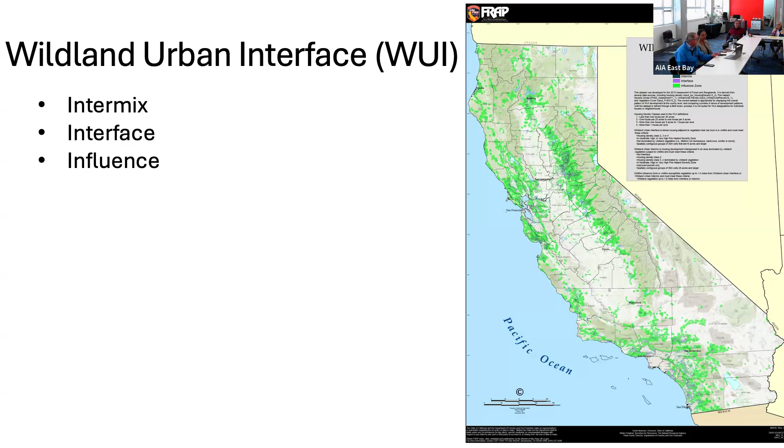So one of the things when we start to approach a project is you really need to determine very early on, is the project in a fire zone area, and who is the jurisdiction? Because the code says one thing, but each municipality or each jurisdiction can have even more stringent requirements, and they vary tremendously.

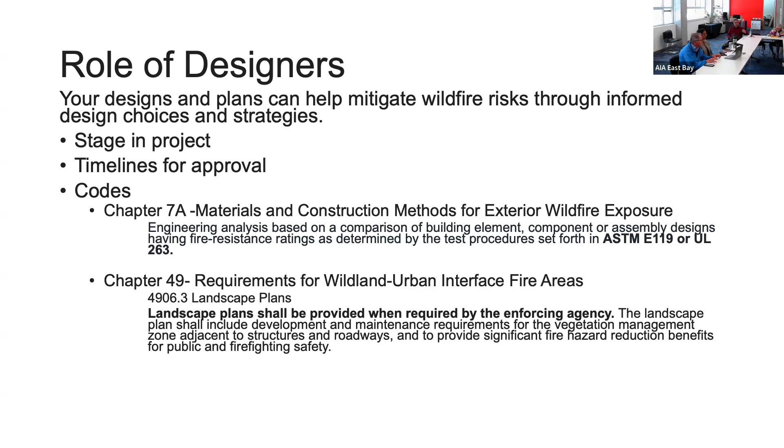Chapter 49 looks at what are the additional requirements for wildland urban interfaces. So when the jurisdiction, either the city or the enforcing agency, requires landscape plans, we have to provide a landscape plan. Some of them call it a vegetation management plan. So we have to get into the zones and we'll talk about that. Oh, 1 second before we move forward. So there's really two areas. One is the idea of what's called hardening the building, selecting materials that are fire resistant, and that's mostly with respect to Chapter 7A. The other, Chapter 49, is really dealing more with reducing the amount of fuel within the perimeter of the structure to reduce the risk of fire spread.

So there's the role of the architect, designer, landscape architect, but a lot of this also is really the role of the owner, because as a designer, you can only do so much. And then in this condition, maintenance is a huge need and requirement. And so that really falls on the owner to continually maintain the property throughout the year.

But for fire, et cetera, fire departments require an address clearly marked because fires spread very quickly. If the fire department can't find the property and get to the property, say in a rural environment, your trees or whatever is covering the access to the property, that hinders the ability to fight that fire quickly.

And fires can spread extremely fast. There's a record of a San Diego fire that in 1 hour consumed over 5,000 acres of land. I mean, they can move very quickly and create their own climate as well. So some things can be addressed, I think, on the owner's behalf, not necessarily involving the designer, creating a more defensible space in terms of maintaining that property. We'll talk about that a little later.

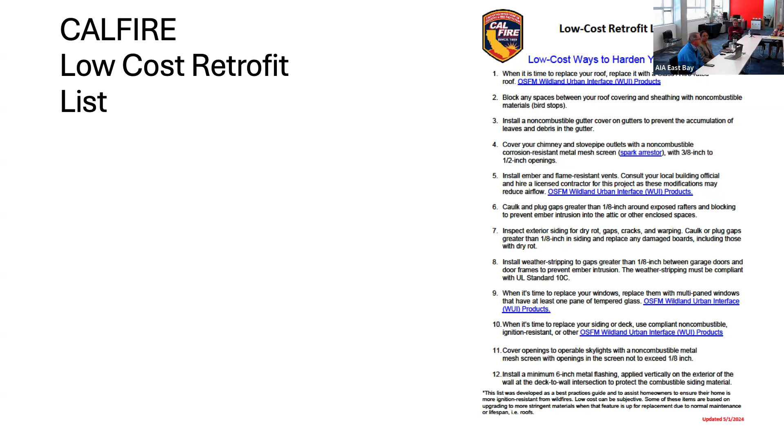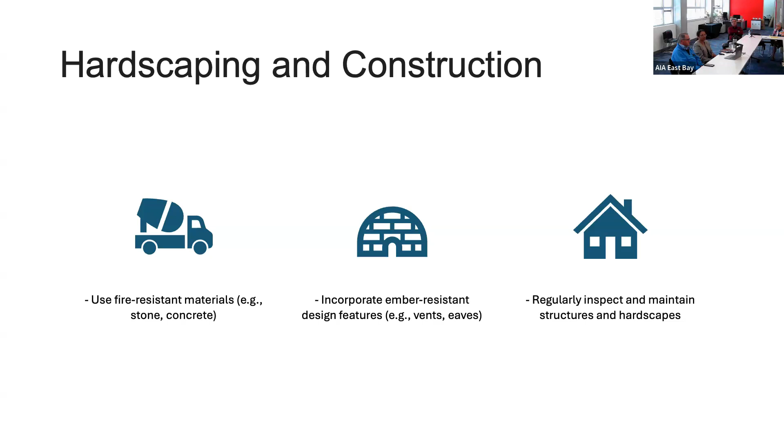When it comes to hardscaping around the house, one of the requirements was to use only stone and concrete in the paving, not to use any flammable products. So use pebbles or stone or concrete, and incorporate ember resistant features, like the vents and the eaves should be ember resistant, and regularly inspect them. So whenever there's a maintenance inspection, make sure that around the house, within the first 5 feet, all the materials are fire-proofed.

For decking, because landscape architects deal with decks that are connected to the house, there is one requirement for it to have a metal flashing at the house. And some of the homes that I've worked on that have decks, the planner sends us a checklist, and you have to make sure that it's built out of fire-resistant material or fire-resistant wood. And it keeps coming up. It had to be signed off twice, so it's quite important.

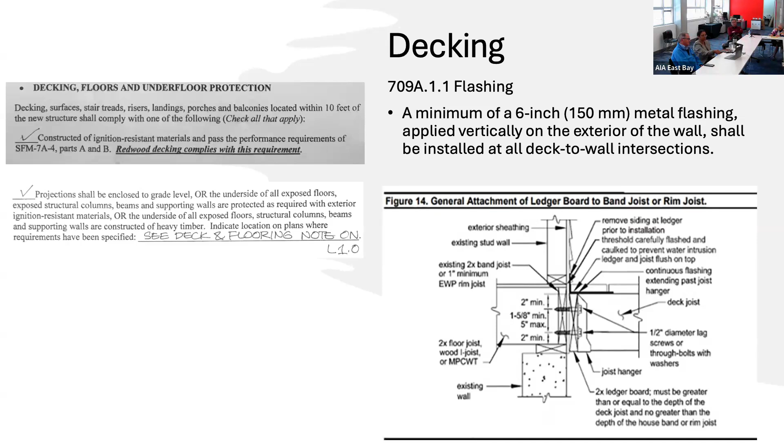Defensible spaces are categorized as zone 0, zone 1, and zone 2. So zone 0 is 0 to 5 feet from the house. And that's the zone where you have to not use fire-prone materials, use very little landscaping, not too much foundation planting, keep it sparse and keep it clean, and make sure that it's inspected and maintained.

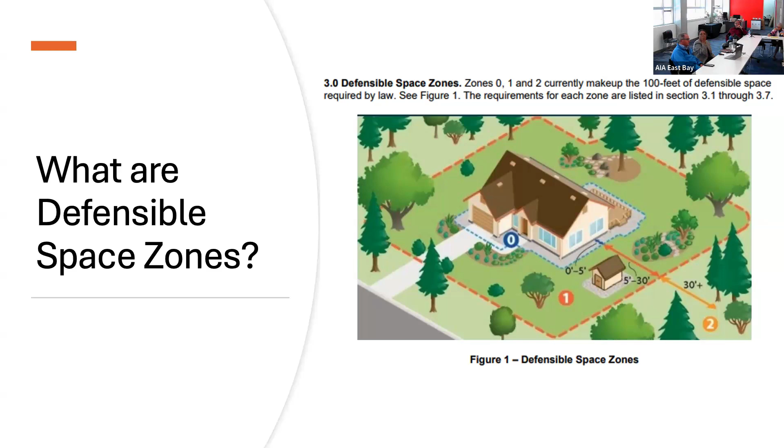From 5 to 30 feet, you can have landscaping and trees, but there are spacing requirements. And that's also something the fire department typically signs off on, because the 5 to 30 feet is quite critical when it comes to existing trees that are fire prone, as well as proposed trees that could be fire prone. And beyond the 30 feet, from 30 to 100 feet is also considered defensible space. So up to 100 feet or up to the property line, whichever is closer, the owner is responsible for maintaining it.

And that first 5 feet is really critical, because you're in very close proximity to the house or the structure. And so the vegetation, you'll see in different jurisdictions it's limited in height, or the type, maybe only 3 inches high maximum vegetation, or X number of square feet, or things like that. And I found that hardscape materials like stone, like pebbles and things like that are probably one of the better ways to go.

Cal Fire has a great video of this, where they put a little shed and they have this 5-foot zone around it. You can again go to the Cal Fire site, and they have one that has vegetation right around the structure, and they light the outside perimeter on fire. And then you see how quickly the one with the vegetation right up to that structure burns, whereas the other one with this 5-foot zone around it in pebbles or whatever is still standing. And it's very effective. So I would suggest sharing it with others.

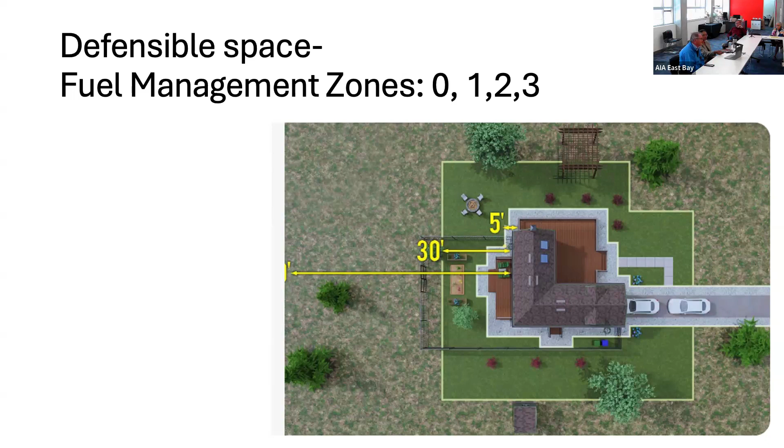Part of this idea of defensible space is to create this kind of a vegetation mosaic where you reduce the risk of fire spread by separating the fuel source, by separating the vegetation. So in some jurisdictions, they'll say, oh, you can only have 200 square feet of vegetation in one area, and then you have to have X number of feet to the next group. And that vegetation can only be like 2 feet high. I mean, there's a lot of stipulations in terms of this idea of creating this mosaic to basically reduce the risk of fire spread.

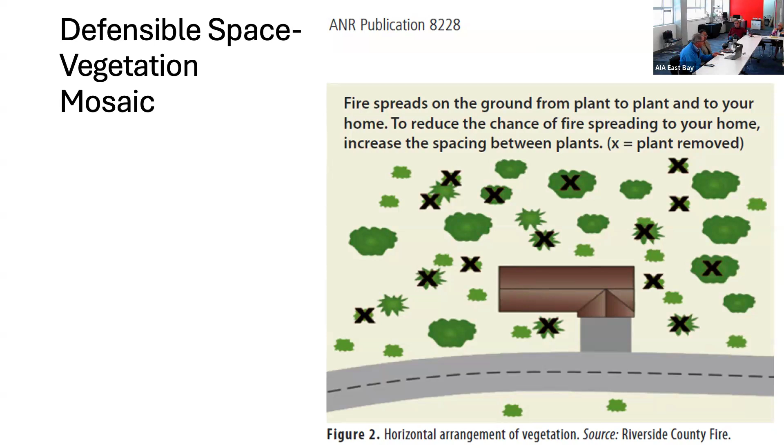Particularly on slopes, because the ability of fire to spread up a slope is critical. And so as landscape architects and designers, there's limitations on the height of vegetation and then how far apart it is in terms of the nature of that slope. If it's no slope, it's 0 to 20%, then it's 2 times the height of the vegetation. And maybe only 10 feet apart of the trees.

And again, actually, we don't mention it in this slide presentation, but part of the code is that basically the code says no new trees within 10 feet of a fireplace flue, or a window, or a roof line, right? But really, if you look at it closely, it's really talking about new trees, not ones that are pre-existing. But if you look at local jurisdictions, they'll say, if it's pre-existing, 10-foot clearance away from any structure.

So this is an issue if you get into steeper land, that this vegetation goes further and further apart. So the aesthetics, we still have to wrestle with this aesthetics. Yeah, I mean, we're gonna go back to the Zen gardens. Yeah, when it comes to the steepness of the slope, on a flat surface, fire flames can be like 6 feet, but if it's steep, it can go up to 24 feet. So that's why we have to space them further apart.

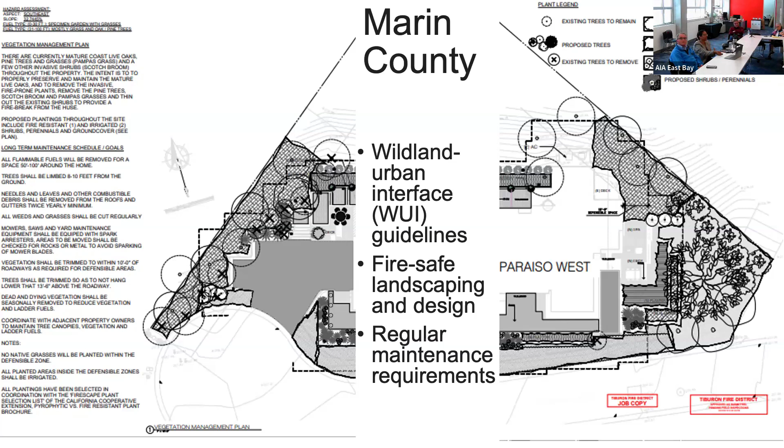And also they had requirements for maintenance equipment, such as mowers. Mowers can create sparks, and those sparks can be quite dangerous if there's dry vegetation. And also trimming of trees and other vegetation within 10 feet of roadways for defensible space. Marin County has a fire department as well as a fire awareness department. So they create educational outreach programs, and that helps a lot.

San Mateo County, for fireplaces and fire pits, the department asks for UL certified products. And a lot of products that are out on the market, like Amazon, that homeowners purchase, they don't actually verify if it's UL certified. So when designers and architects and even landscape architects specify this, you have to make sure that it's UL certified, because a lot of the products in the market are not UL certified.

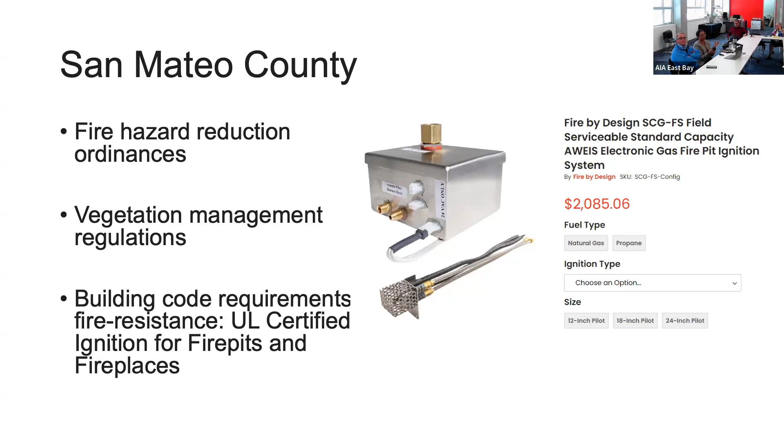They can actually be adapted to UL certified igniters. So that's what we do when we specify a certain fireplace or fire pit. The igniter has to be UL certified, so that has to be an additional specification. So for fire prevention, you use fire-resistant plants and materials, incorporate defensible space, ember resistance is very important, and implement regular maintenance.

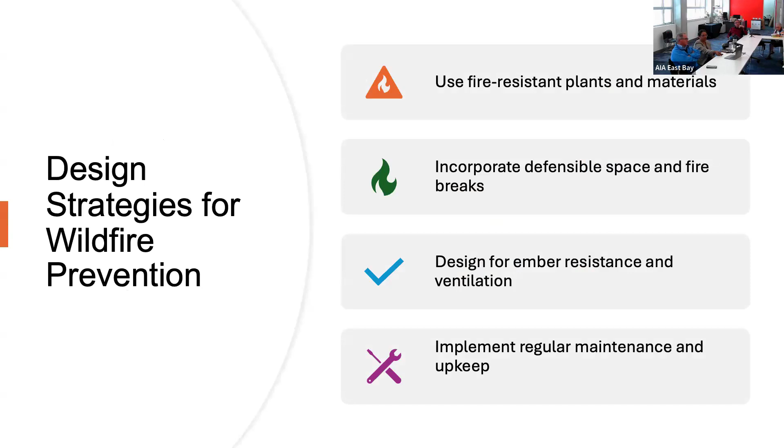So in conclusion, as architects and landscape architects, our designs have to help homeowners and residents. And in order to do that, we have to collaborate with our clients and make sure they're aware of local requirements, and also talk to the fire department early in the process, so you're aware of any additional requirements that they may have.

There's a book by Douglas Kent called Firescaping. That's an excellent resource. He talks about location being critical, because homes that are in the canyon or on the hilltop, on the ridge, are especially more prone to fires because of the wind conditions, because wind carries fires onto the ridge, which I did not know till I read the book.

And also what makes homes on ridges more difficult is the access, because their driveways are very steep, and it's difficult for fire trucks to maneuver those driveways. So the fire department will actually inspect it, but I've seen homes where the driveway is steep and they have sharp turns. So having the address at the base of the hill becomes more important. And also we looked at county websites and CAL FIRE. CAL FIRE is a very good resource for information.

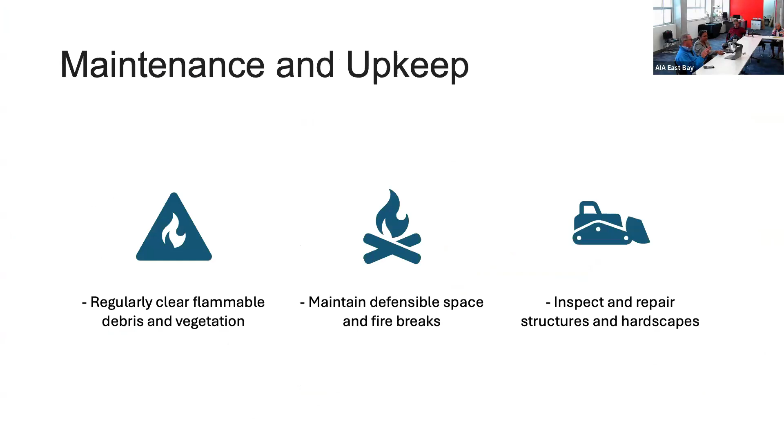There is, though. Oakland, Berkeley, those hills that we pointed to, that's a high fire zone. No, we live in Alameda. Oh, close to the water. Yeah. Well, the fire risk in Alameda is when we have the big earthquake, we have no water supply to the island. And there have been residents saying we actually need a fire boat with a fire pump on it so they can put out any major fire, and there is none.

Yeah, and also because of climate change, these fires are so fast. And the flames, the one that's happening near Sacramento, the flames are like 5,000 feet high. Well, because of the intensity of spread, the heat, and then when you get terrain with a wind flow, it just fans itself. And it's creating its own weather conditions. Yeah, this morning I read there was a fire vortex.

Well, that's a problem they have in Southern California in the Panorama Hills. They always have fires down there, and yet the people have a lot of money, so they just clear their site and rebuild again, and it's a cycle they've accepted down there. It's almost like there are these pockets of people willing to live with the risk, but really they're also causing a higher risk for the upkeep, maintenance and protection.

Yeah, I think if you like the lush, overgrown feel of nature in the context of your own residence, as I do, we have two 70-foot redwood trees and money trees and stuff like that, but you should live in the flatlands, because what you guys are saying about slopes is really key to the spread of fire. In the flatlands, you can have all these trees, but there's also an awful lot of material that is just not timber friendly. Asphalt roads and roofs and stuff like that.

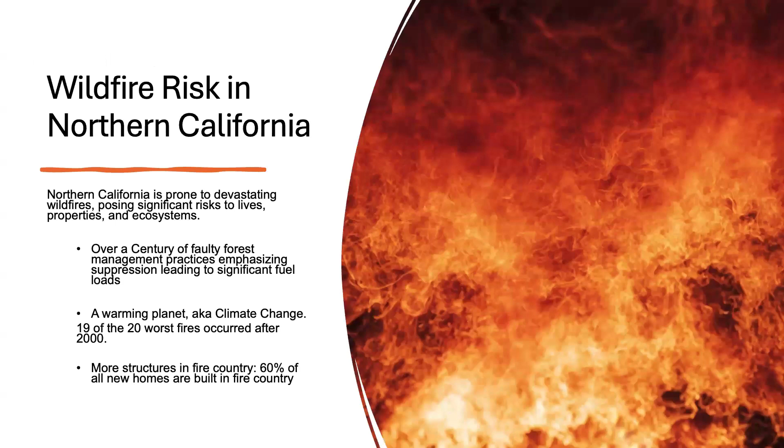And I noticed in the diagram near the beginning of your presentation that the garage door was labeled as, I think, a low priority when it showed the structure and the parts of the building that were high priority, low priority. Yeah, there it is. The garage is labeled green, which is low priority. But by California WUI code, that is actually supposed to be fire rated, just like any exterior door.

Well, I'm not sure this diagram came from Cal Fire or UC extension. But it does mention fire, it points to the garage door. I think that does have to be addressed. Well, I mean, the garage is labeled green, which by the scale to the right is low priority.

Sure, I understand the roof issues, but my question was actually related to the fire resistivity requirement of the garage door. And I wondered if anybody else had encountered this because the cities don't seem to be aware of it. They're definitely not enforcing it. And contractors look at you like you're from outer space when you say you have to get a fire rated garage door.

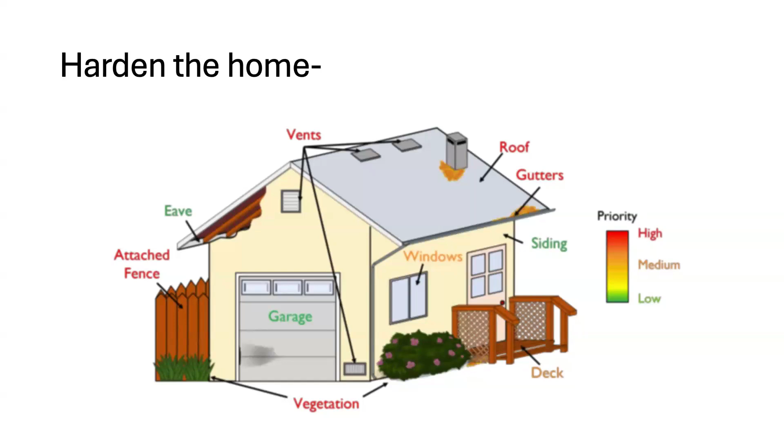And this gets into evacuation, which has to do with being prepared if there's fire weather or a red flag day or high winds. We should all learn to be aware, sign up for alerts, have knowledge of what's happening around you so that you can move your car out ahead of time and be ready to go or evacuate early.

And then I think the other problem with houses in Sonoma is if someone went into their garage and they just inherently closed their swinging door behind them and it happened to be locked, they're locked in their garage. Oh yeah, with their electric car and a beautiful lithium-ion battery. Because if you lock your door between, let's say, your kitchen or your laundry room, and then the door just swings closed, you're locked in your garage, you can't get the garage door up and you can't get out of the swing door. Yeah, that code has definitely changed. Yeah, yeah.

Any other comments, contributions? Well, quick question, earlier on you touched on decking for a minute, and you also mentioned the petroleum-based products. We can't always avoid decking completely, especially on some of these sites, so what is the preferred or recommended path forward at this point in time? I think Woodside Fire Department said that for decking there are Trex and TimberTech. They're not considered combustible, but they'll melt, I think. They're not good when a fire happens, but they have a fire rating. I saw TimberTech and Trex in that list of fire safe products.

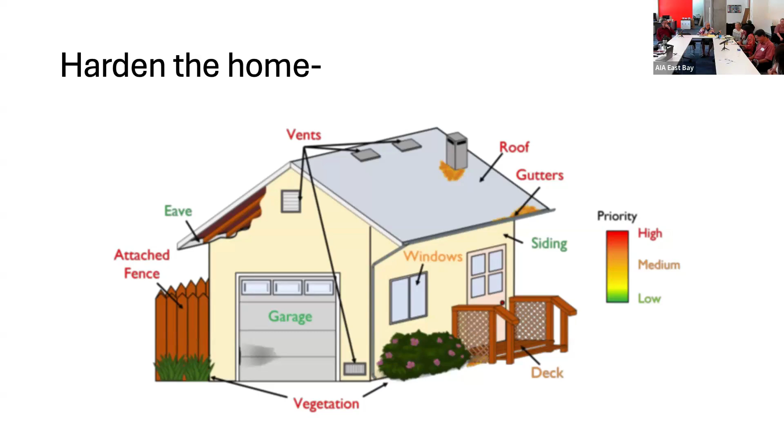That's a nice discussion. Any other comments? That's a pretty hot presentation, Peter. Well, I was thinking about bringing ice cream in, thinking that it may attract more of the remote viewers into the room at a later event. It's too warm outside. Marshmallows? Marshmallows, yeah, that was pretty slick, actually. You'd have to up your game a little bit to show up for marshmallows. Roast them over the wildfire. Thanks, everybody. Fireside chat.